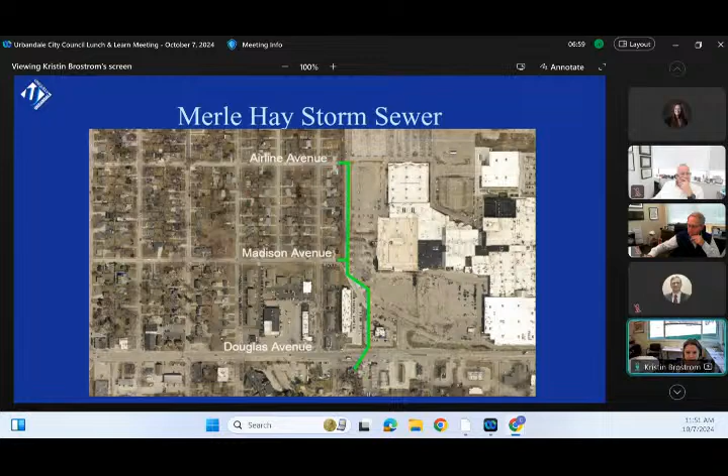Diving right in, hopefully you all can see the presentation. Starting with the Merle Hay Storm Sewer Project, we've got the location map up there. We are putting a very large culvert up through Douglas, through the Merle Hay facility to Madison and Airline. Fred Soddy in our office is the inspector on this one, and Eric Peterson is our project manager. We have about 1,600 linear feet of box culvert and 1,000 tons of riprap at that south end.

The storm sewer is being extended to Madison Avenue and Airline Avenue for further extensions documented in our 2019 stormwater drainage study. This was not one of the original 10 projects prioritized in that study because we did not think it would be feasible given the location, but circumstances changed and we were able to move this one closer to the top of the list. Without this project, we really can't open the rest of that neighborhood up for the continued extensions, so this is really critical to getting storm sewer to that neighborhood.

The cost of the project is $5.78 million. Our contractor for this is CJ Moyna with Progressive Structures. The original schedule was that this was supposed to be a 2-year project. Now that they've gotten across Douglas and they're making their way up through the mall, they're moving very quickly, and they are actually aiming to wrap this up before Thanksgiving.

So the nice thing about it is that other than the mall utilities, which have been a bit of an obstacle, there's not a lot of other utilities in that parking lot to deal with, and so it allows them to go faster than a similar project would go on a street.

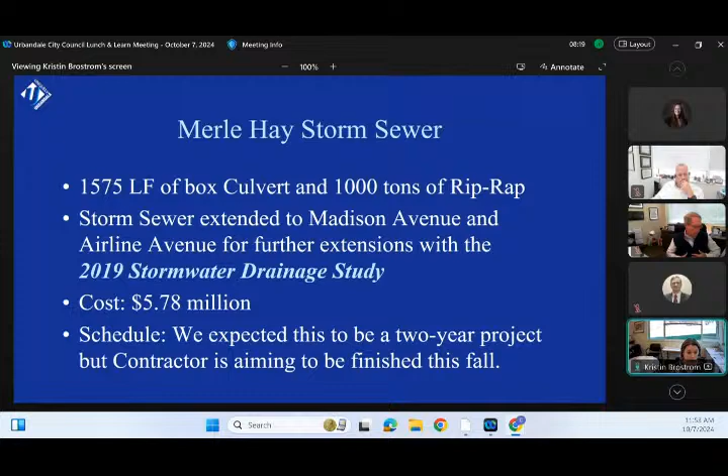A few photos for you here. This is the outfall, where the restaurant used to be, and now we've got this new head wall. The culvert on the left was the existing culvert that ran underneath the restaurant, and you can see the new head wall incorporates the new culvert on the right.

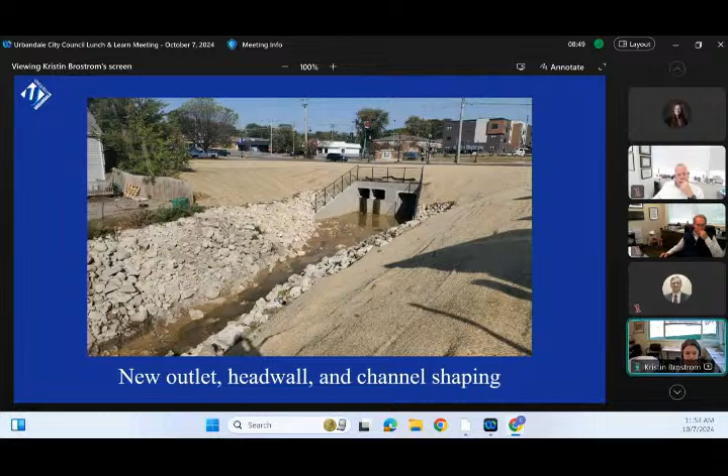We also placed some riprap, and they've put the erosion control matting down. This was a couple weeks ago, so things haven't quite popped for the grass yet, but it will be restored that way. You can get a scale of the size of this box.

You can see the construction workers in there. They brought in a very large crane and backhoe to get these moved around and get those boxes positioned. The trench boxes are fairly deep because they have to make it all the way up around the mall property.

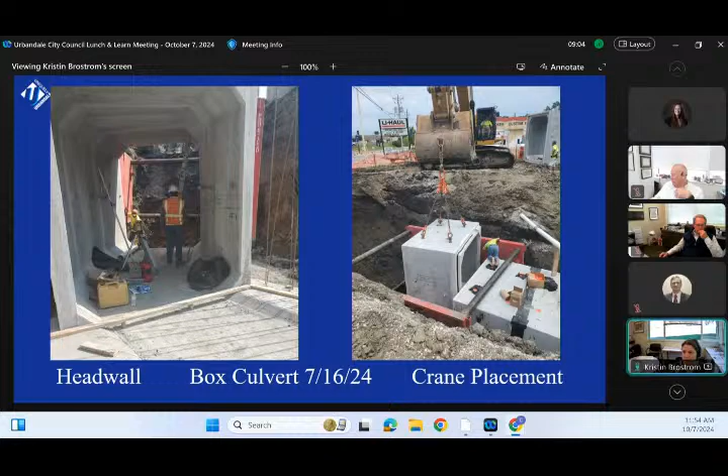Again, another shot of some of the utilities they had to deal with. They worked on supporting the water main and several utility ducts as they slid the box underneath those. That was part of the reason why going across Douglas was slow going - the utilities in that area.

On the right is the shot. It's kind of hard to tell, but we are between Lillis Loft and IHOP heading north through that area. Again, the trench is somewhat deep, which makes it a tricky work location.

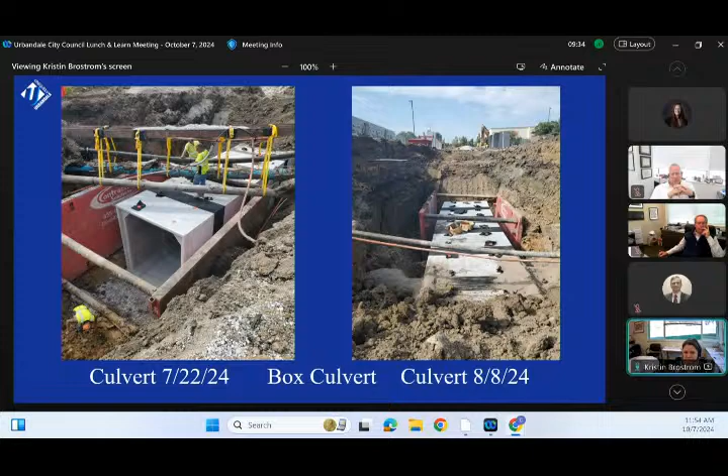This is the pouring back of Douglas Avenue. It was PCC with an HMA overlay, and paving of the IHOP parking lot. The parking lot has been paved and is reopened. They've got a little bit of work to do at the IHOP entrance, and then they'll be done in that area.

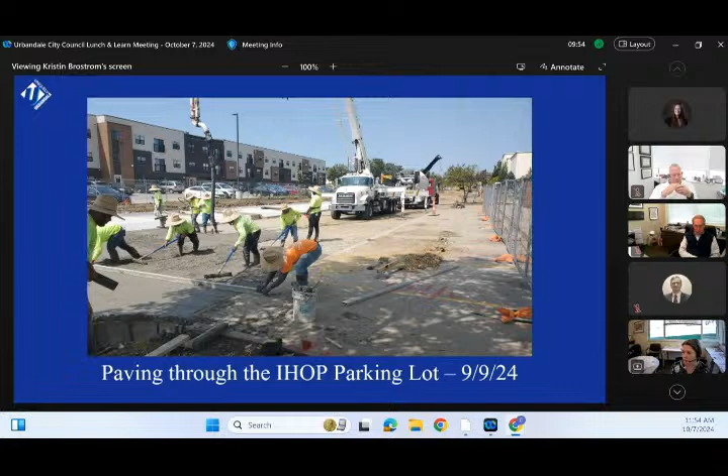So to give you an idea of where we're at now, we are into stage 4. They're hoping to make some of the connections to Madison with a separate crew this week. They are proceeding north into stage 5, and then they'll turn the corner there. We also have an upcoming project, which we'll mention again later, to extend those farther west.

As long as we're here, the intersection at 65th and Airline had some severe flooding in that June 2018 event. It's kind of a local low spot with no outlets. So in a few years, when we can extend that storm sewer farther west, that will really provide much better storm sewer service to that area.

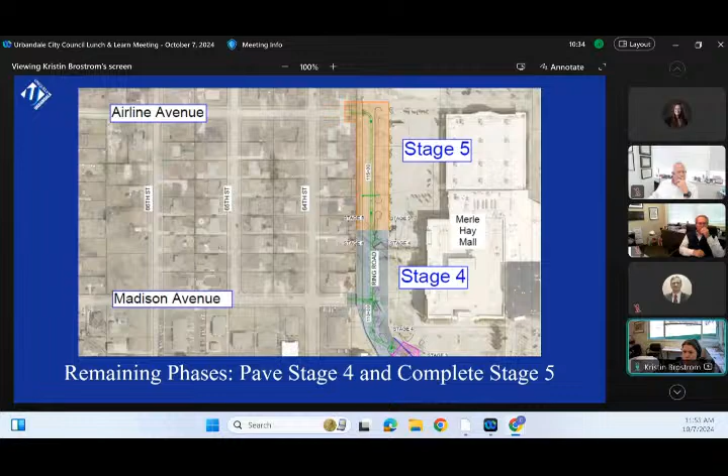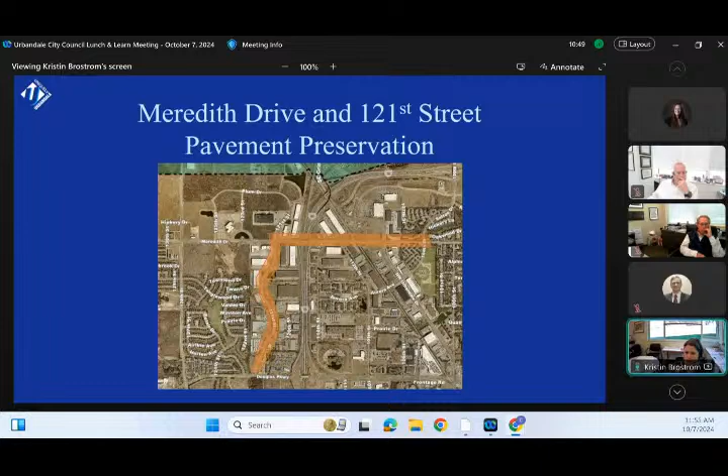We have 12,000 square yards of PCC patching over 2.2 miles. That includes 5,500 tons of HMA overlay. We did that between 114th Street and 104th Street on Meredith Drive. It's a 3-inch thick overlay done in 2 lifts.

As part of our Complete Streets Master Plan, we are building the 10-foot trail and associated ramps from Northwest Urbandale Drive to 104th Street. We already have a trail east of Northwest Urbandale Drive, and next year we're going to do a patch and overlay continuing east to 86th Street, and as council knows, we will be extending the trail with that project. The cost of the project was $2.4 million for the construction.

And another $1.1 million for undergrounding the electrical and replacing the street lights between the railroad and 104th Street. As far as schedule goes, we have the roadway portion essentially complete. They've still got a few structure adjustments to make, but the patch and overlay is done. The trail has to wait until the electrical poles are removed.

Intren is the sub for Mid-Am. They are working on that project now, and we're still hoping that can get in yet this year. Inspector on this project is Scott Ford, and our project manager in the office is Jordan Babler.

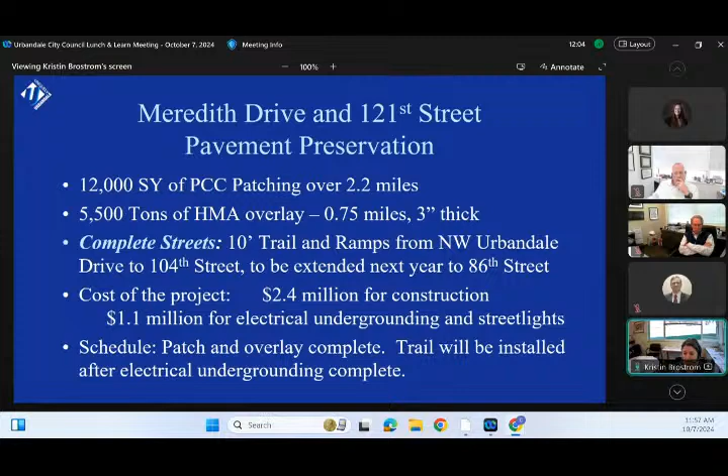Here's a photo of the asphalt overlay work. They did do that at night. It does require full road closure. You can reopen side roads and driveways pretty quickly after that - usually about half an hour is a total closure for something like a driveway if there's no other route. But closing down the whole road and doing it at night really helps the contractor have the room to work and go quickly.

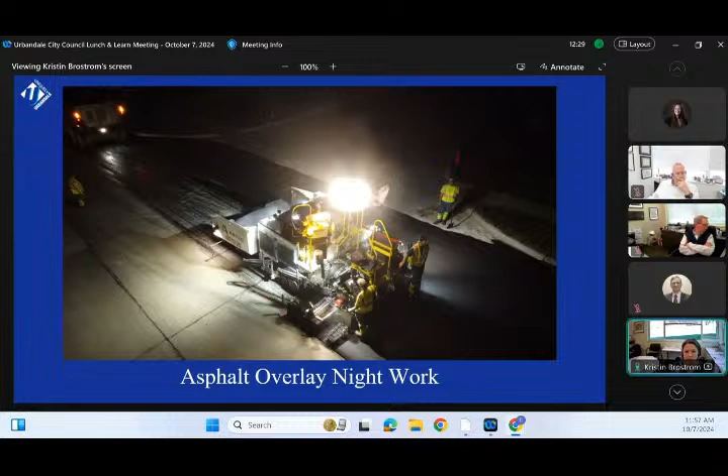And then here's a shot of the completed overlay looking west from Northwest Urbandale Drive. It looks pretty nice when it's done.

As we think about complete streets on Aurora, this is one of the reasons why we want to do that little overlay on Aurora. It really helps the pavement markings pop and you can see things very clearly.

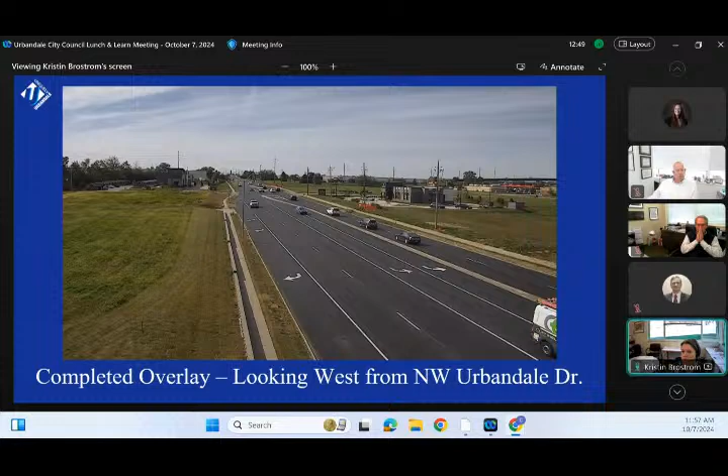70th Street and Hopkins Road storm sewer. I put a little arrow at the intersection of 69th and Hopkins. What happened was the storm sewer was damaged from concrete that was dumped into it. It was almost completely blocked at a couple of locations along this run, and that caused local flooding at that intersection. Thankfully, the overtopping was down the street before it got into people's homes, so there wasn't a danger to the buildings, but obviously it was a problem that needed to be fixed.

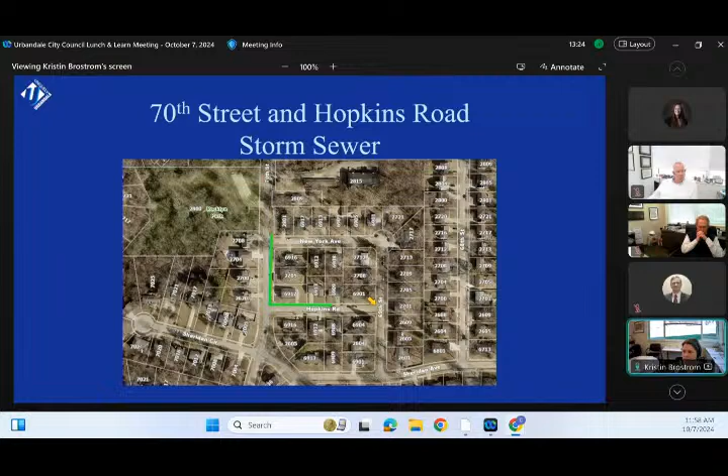Tim Terrell is the inspector for this project. We are replacing 553 linear feet of storm sewer with this. We are upsizing it per those recommendations from the 2019 stormwater drainage study. That's kind of a high-level study, so we did refine those calculations and look at the capacity again, and we are sizing that appropriately. It was a bit of a challenge with the electrical, gas, and other utilities in the area, but we were able to make it work.

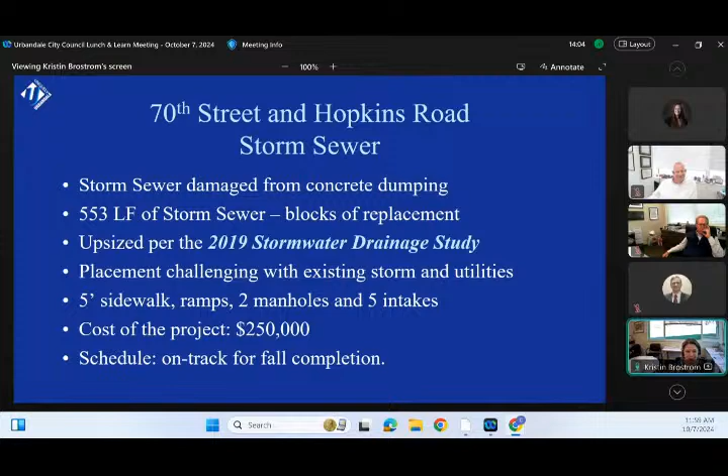We are also replacing the sidewalks with 5-foot sidewalks and the associated ramps. The cost of the project is $250,000, and they're making good progress on it. We expect them to wrap up. I hate to jinx it and say out loud, but in the near future, let's say, they'll be wrapping this one up.

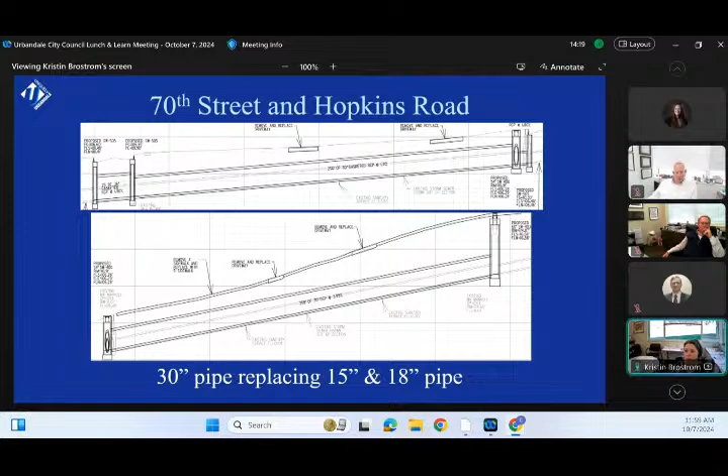Just to get a sense of the size of the change in the storm sewer, there was an 18-inch pipe on 70th Street and a 15-inch on Hopkins Road. Those are both being upsized to 30-inch pipes, so quite a big change. It's kind of tough to get photos on this one, partly because the contractor's moving quickly. So they've got the new backfill in and are getting the sidewalks in and getting those driveways open back up again.

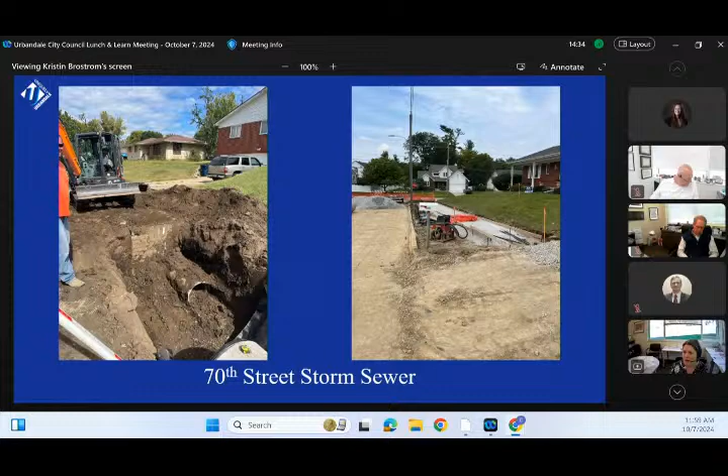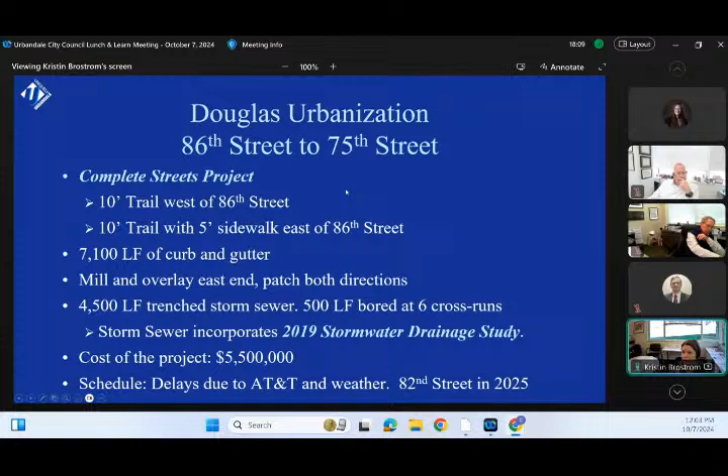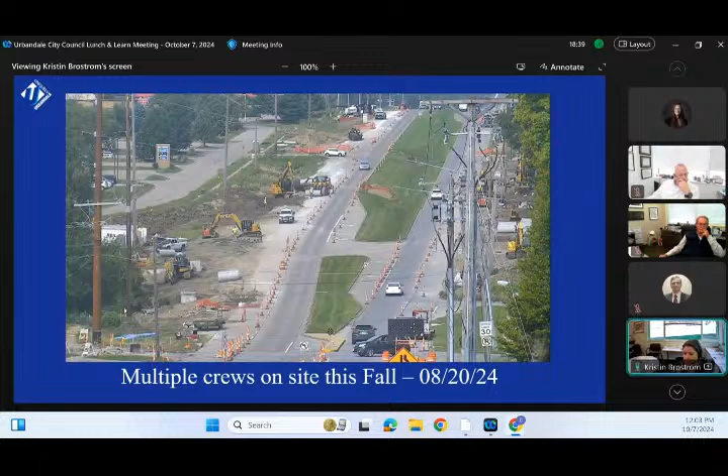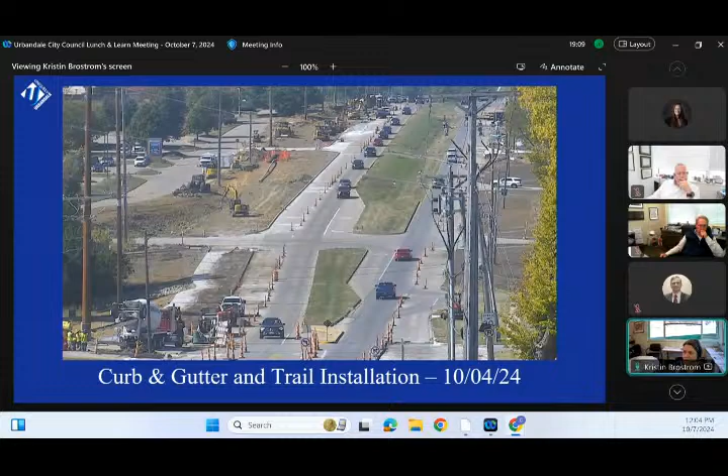And then just a couple of shots of the storm sewer. It is quite deep in locations, again, because we're trying to get that capacity up to the neighborhoods for future extensions.

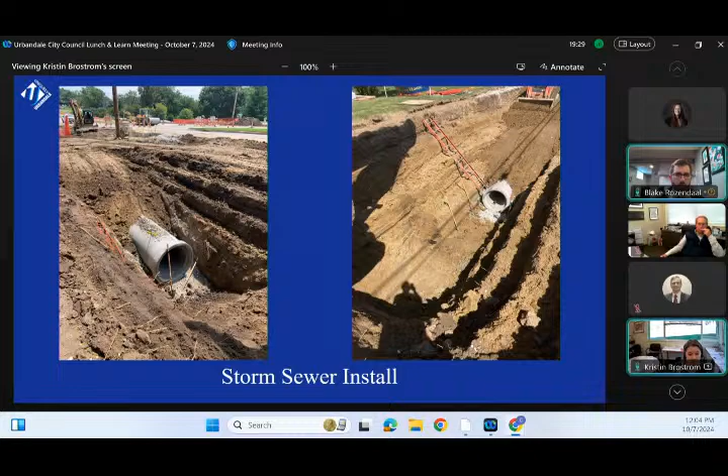Our annual patch program. On the southeast corner of Douglas and 86th, there's a traffic crossing button that's kind of farther back behind all the tape and rope and everything.

Do we know when that's going to be more accessible again, just so that folks getting up to that corner can more easily cross? Yeah, the southeast corner is actually closed right now for pedestrians because of the sidewalk being out, so I do not know when that will go back in. Obviously, the goal is to complete all the work on Douglas yet this fall, so I would hope as soon as they can safely put it in, they'll get it in. Sounds good, thank you.

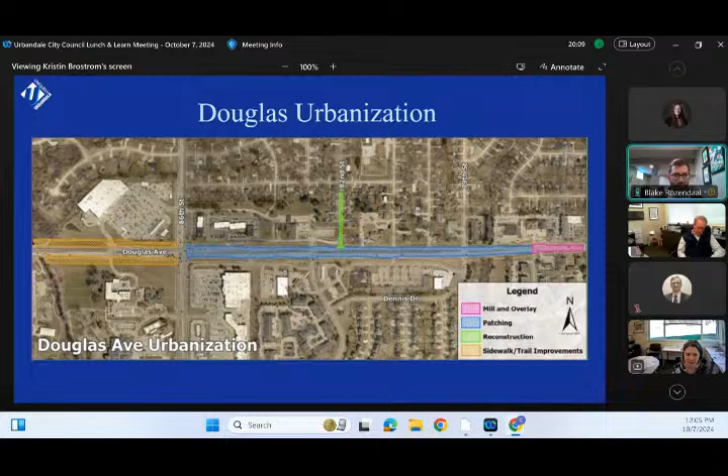Our patch program. We had 3 phases again this year, 2 in residential neighborhoods, and then 1 on Douglas.

In eastern Urbandale, last year we had worked near Lockner Drive. Now we're doing the other half of that neighborhood. It was about 4,800 square yards of patching there. And then in the Parkview neighborhood, we had about 7,500 square yards of patching. We did not patch Parkview itself. Originally that was part of the plan, and then it became clear that the street there was so deteriorated that we really need to look at a full reconstruction. So that's one of the things we'll discuss with the upcoming CIP projects. And then, of course, we always include any impacted ADA ramps with those replacements.

Phase 2 of the project was patching on Douglas Avenue near the roundabout, doing some maintenance on that arterial. The cost of all 3 projects was $1.17 million. A portion of this year's money for pavement rehab was used for Douglas Avenue urbanization, which is why the number's a little lower than our usual levels.

All 3 projects are complete. Brothers Construction was the contractor for all 3, and we are working with them on wrapping up the punch list and final restoration to get those closed. Our inspectors for these projects were Tim Terrell and Scott Ford.

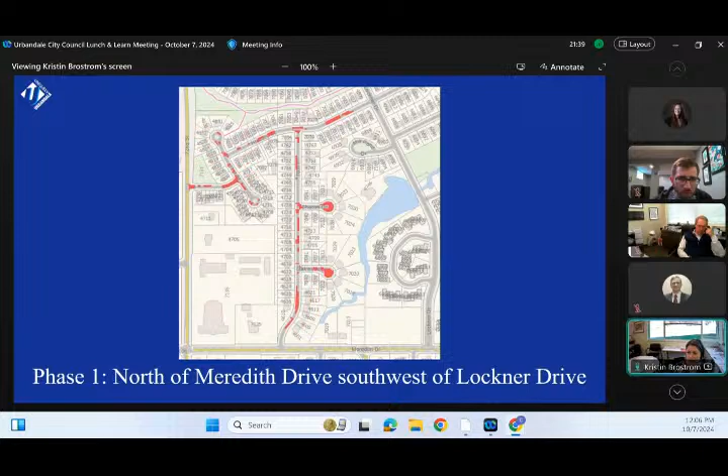Again, just looking at the locations for this, this is phase 1. It was north of Meredith and east of 72nd Street. Phase 2 was along Douglas Avenue, just a few patches that needed some attention. And then phase 3 is in that Parkview neighborhood. Again, you can see there that we did not actually patch on Parkview. Hammond Tree, we also did not patch on because it's a composite pavement. So we'll look at addressing both of those in future projects.

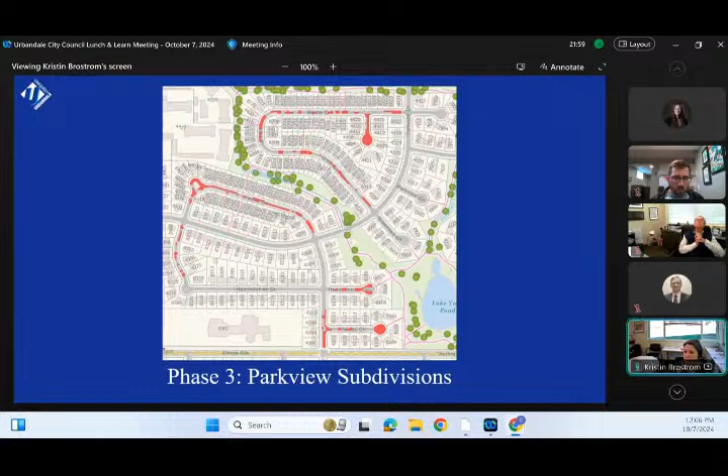Our community entrance signs. We are wrapping up three from the 2023 project at 86th Street and the south ramp of the interstate, at Northwest Urbandale Drive where we replaced the previous sign at that location, and we've got the smaller monument at 100th Street south of 54th Avenue.

That was a $320,000 contract with Edge Construction, and again, we should be closing that in the very near future.

For the project that's currently under construction, we have two gateway signs, one at 104th Street in Hickman and one at 128th Street, the North Corporate Limits. That's also with Edge Construction at $235,000.

Michael Johnson in our office is the inspector for both these projects. These projects do include the lighting. The landscaping will be completed by Parks after the projects are done.

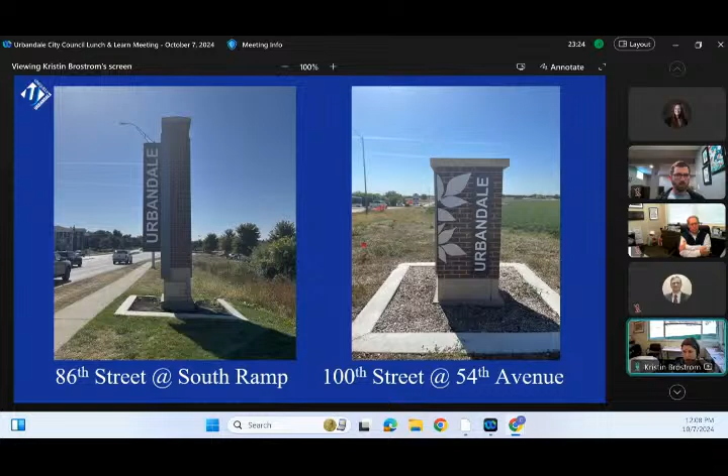Our bank stabilization projects. We currently have a project under contract for the repairs in Sunflower Park and Walnut Creek Regional Park north of Douglas. These were designed by JEO, permits received, and we're under contract with RW Excavating.

I'll show you a little bit more about that in the next couple of slides. As with our past projects, we have made an effort to protect the existing trees and the trail.

We do have some trail repairs that will be taking place with Sunflower Park, but a lot of these we've got vertical banks and fairly deep creeks, and we try to avoid simply laying back the slopes and riprapping the world out there. We try to have more sensitive and context-appropriate practices.

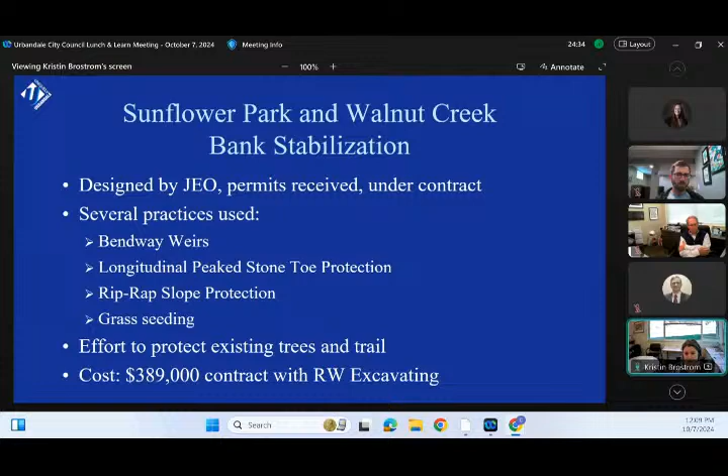This is a $389,000 contract. It has not yet started. The contract will start in December. This is because it's easier to do tree clearing and earthwork in the winter.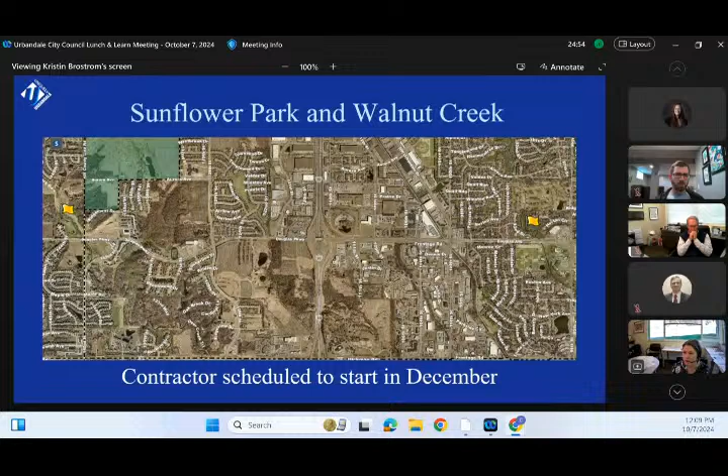So the longitudinal peaked stone toe protection — we used this practice at Beaver Creek a few years ago, and the idea is that you put a line of riprap along the bank in such a way that as the creek naturally evolves and changes shape through the water flows and natural erosion.

That baseline of riprap helps stabilize the bottom of the bank, and it sort of self-fills over time to provide a natural slope.

So by anchoring the bottom, we prevent that erosion from continuing out farther into the bank, but it also helps minimize the amount of riprap that you use and it leaves it in a more natural condition.

It takes a few years to fill in. The intent is that over time it helps to provide that stable cross-section for the flows.

And then bendway weirs — we've used these in a number of locations, and they've worked pretty well for us. The idea is that you put the riprap at an angle, calculated to be at a specific angle, and that does two things: it helps direct the flow of energy back to the middle of the stream, pushing that energy flow away from the bank.

It also allows some siltation behind those bendway weirs, so it fills in and you get a little bench down there, which helps stabilize the bottom of that bank and provide some resiliency when storm events come.

Particularly because we actually have fairly low flows in North Walnut Creek and in Walnut Creek a good portion of the time. They tend to be kind of peaky during storm events, and then they subside.

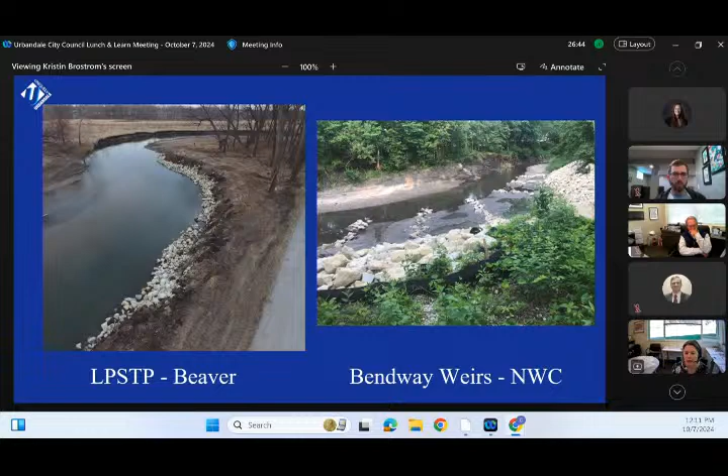So we've got some bendway weir practices, and longitudinal peaked stone toe protection practices. We do have some tree removals that have to take place, and hopefully that just stabilizes the bank to keep it from moving further into the park or into people's property.

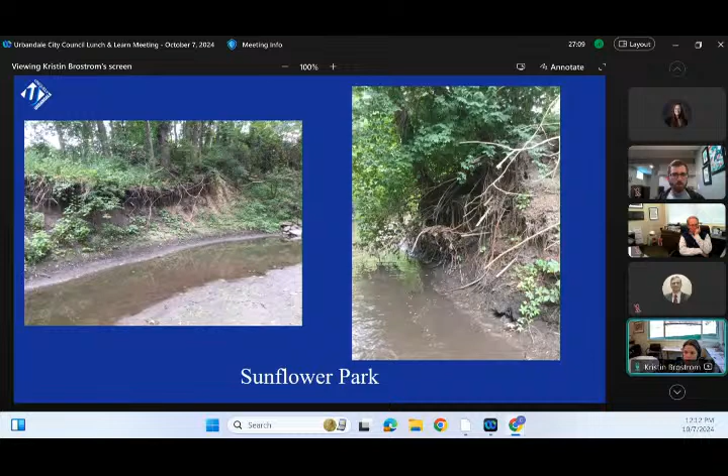And then a similar project for next year with Golfview Park and Walnut Creek bank stabilization, south of Douglas Avenue. JEO is also designing this one for us. We've submitted permits and they're working on refining the design.

Again, we're using those same practices, plus some tree topping practices in Golfview Park, which I'll show you more about in a minute. We've been working with the Parks Department to provide a product that works for them long term, and we made an effort to protect the existing trees and trail while stabilizing those vertical banks.

We do get a lot of concerns from residents when we remove trees, particularly in Golfview Park. It's right in everyone's backyard, so we try to be very respectful of not clear cutting the trees.

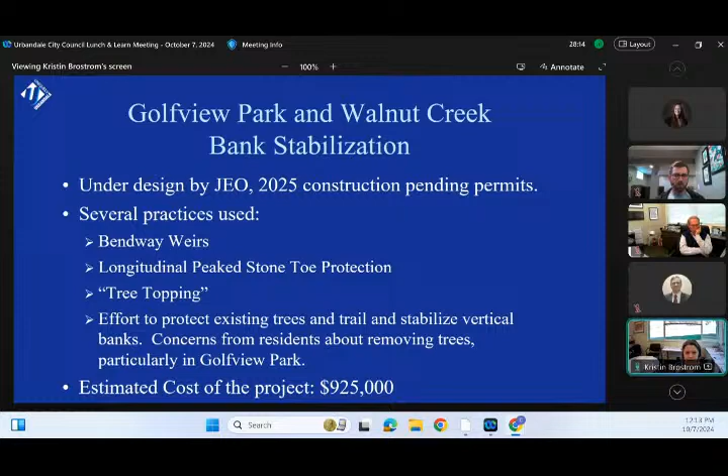The estimated cost of this project is $925,000. We did get pretty good prices on the last bank stabilization we just talked about, so I'm hoping the cost goes down when we actually go out to bid, but it's kind of hard to estimate what these projects will cost. A lot of it's labor instead of materials, so it's a little tough to estimate.

Again, the locations for you there on Walnut Creek, south of Douglas Parkway, and then in Golfview Park, east of 100th Street.

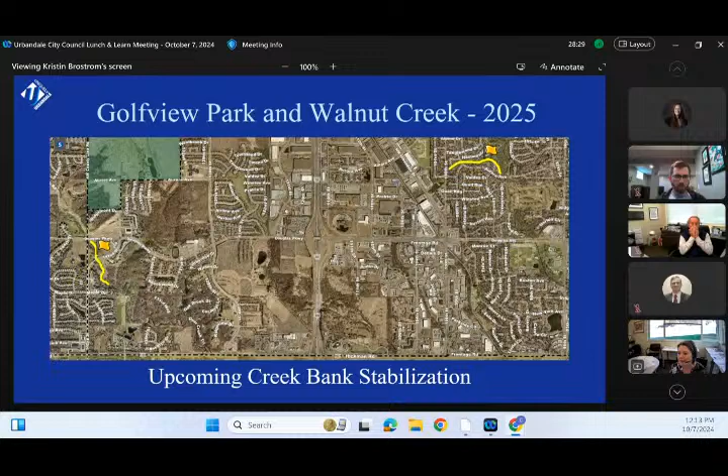So one of the practices we're looking at with this project is called tree topping, where you actually cut off the tree either a few feet above the ground or farther up. We've had a lot of discussions with parks about what this will look like visually. The idea is that the leftover stump provides habitat for a number of animals, plus it allows a more natural degradation over time without disturbing the bank.

So that's one of the practices we're looking at in Golfview Park in particular.

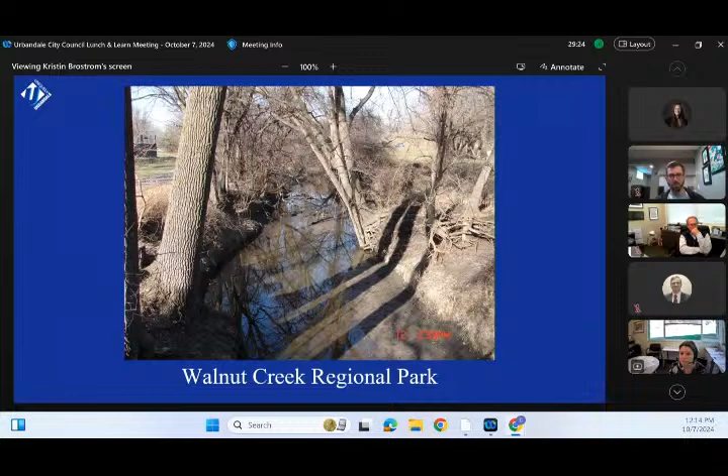One thing I didn't mention was the Walnut Creek Regional Park Trail and Bridge. That's also with RW Excavating and will be done this winter. They'll start construction on that as well.

We've got other inspectors in the office. Coleman May and Sean Watson helped with the sidewalks and trail projects. Dustin Creech, one of our project managers, also assisted with those. And then we've got a new GIS technician, Caleb Strupy Wheeler, who's been helping with our sidewalk program, really helping us get back up to speed with our GIS stuff. And then our locator, Cheyenne Thomas, helps with all these projects, making sure everything gets located.

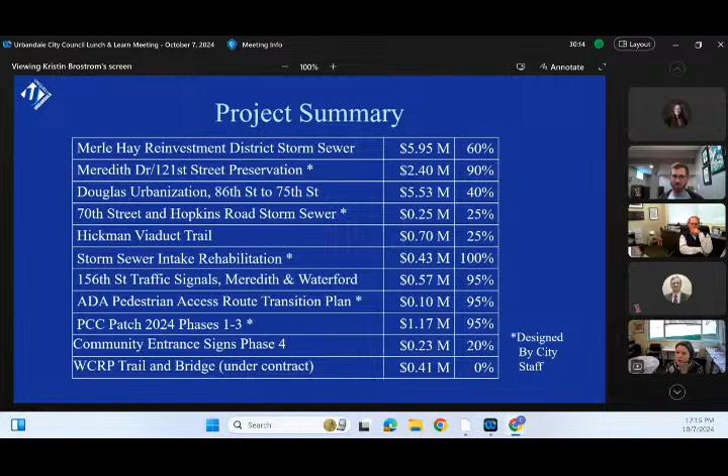Other projects not on that list are kind of smaller ones we've also been working through. As I mentioned, we've had a number of trail and sidewalk projects this year. We've got our ongoing sewer maintenance projects, and then the 100th Street Adaptive project, where we've been working with the DOT to finalize the requirements, and we're hoping to do the final phase of that shortly.

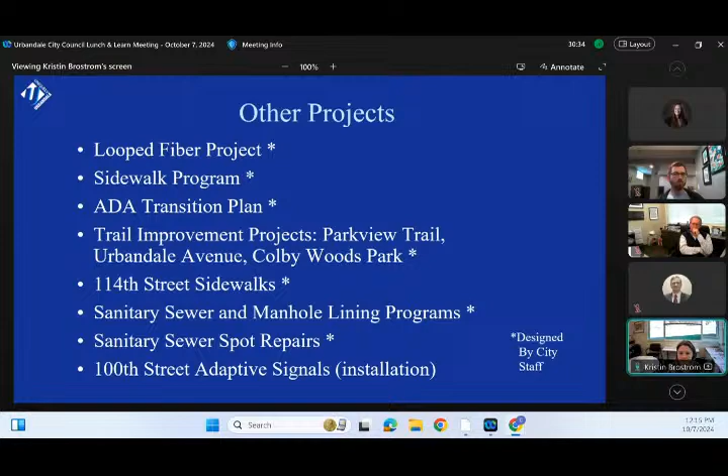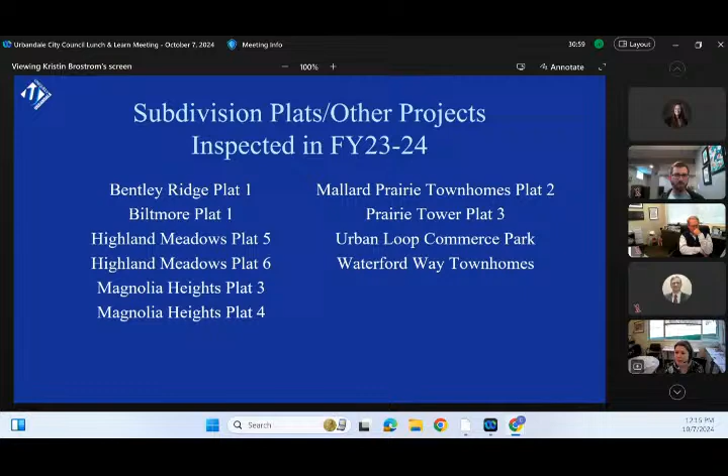In addition to our city projects, we inspect subdivision projects that are building public assets, public infrastructure for our acceptance. We had quite a few projects last year, and a lot of these are fairly large. Highland Meadows, Plats 5 and 6, Bentley Ridge Plat 1 - these are large projects. Prairie Tower and Urban Loop Commerce Park are two of our commercial developments. And then we've got a number of others still in progress. Bentley Ridge is a large plat.

Total Health Experience is the commercial development on North Park. We've got a number that are in the queue. It has seemed the last few years we had a big spike in development post-COVID, a lot of lots being built. We have quite a few lots in Urbandale.

Development is slowing down a little bit. The subdivisions are getting smaller. I think across the board, across Iowa, we've heard that development is slowing. Also, I think at this point, we do have a lot of lots in Urbandale that are available for building, so there's less of a demand, but it is slowing down compared to the last couple of years.

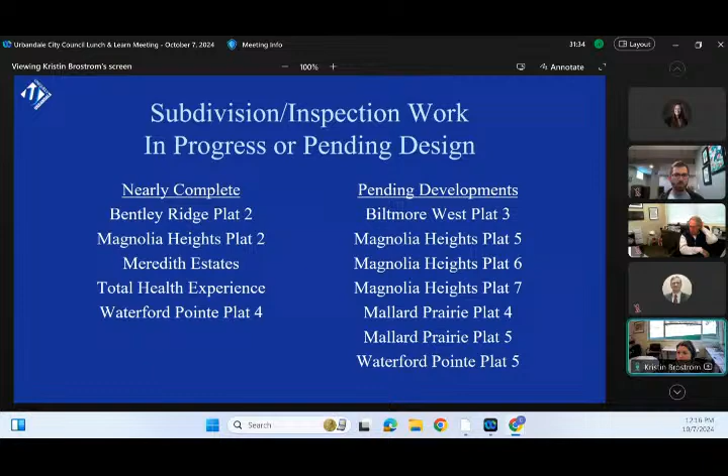Looking ahead to 2025, the major projects coming up: we are reconstructing 142nd Street as our standard 4-lane arterial cross-section, including the Complete Streets Trail from Meredith Drive to Waterford. That's a joint project with Grimes.

The Roseland Drive reconstruction, we'll talk a little bit more about that in a moment, but that's our next major project from the 2019 Stormwater Drainage Study. Our usual annual patch project. We've also got a number of projects for patching and pavement preservation that are using TIF funds, such as the Justin Drive project. We already talked about the bank stabilization. And then we've got our usual, I guess you might call them smaller or routine projects, the ADA plan, trail improvements, traffic signal improvements, that sort of thing.

Obviously, the Hickman interchange is continuing with the DOT's lead on that. And then the WRA trunk sewer, we'll talk a little bit more about that, is coming in the next year or so to improve their capacity.

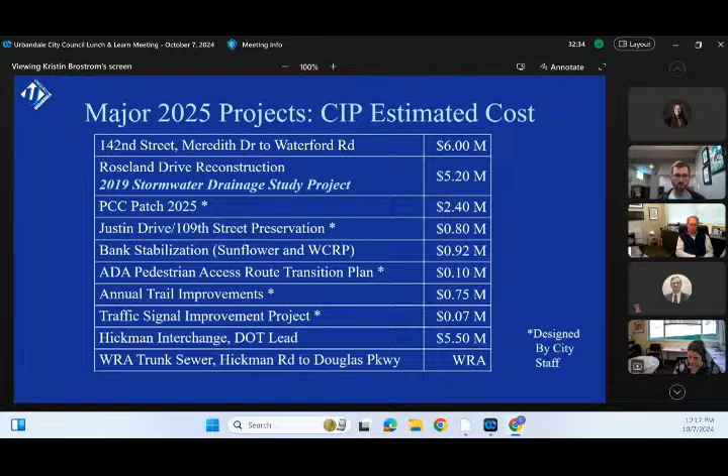They are constructing a new trunk sewer from Hickman to tie in to Douglas, tying in near where Waukee and Grimes started their sewer extensions several years ago. For the most part, it is paralleling our sanitary sewer. There's a little bit of change in alignment up by 142nd Street, but for the most part, it parallels us. So we've been working with the WRA and Snyder and our Parks Department as this comes along.

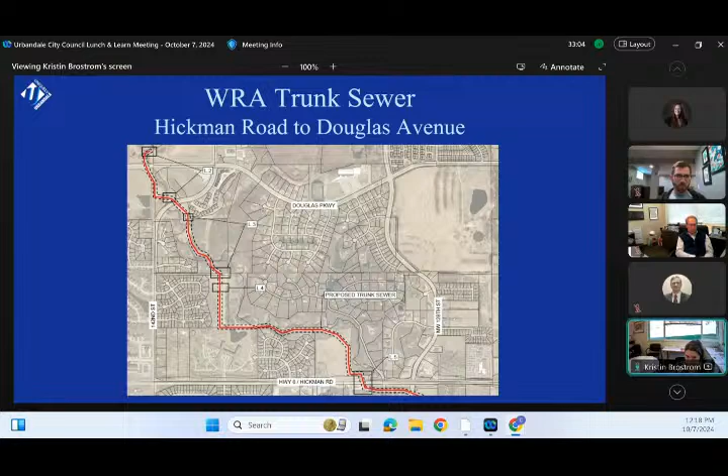To give you the bigger picture of that, the red is our section. They are hoping to start that next year. Depends on right-of-way acquisition and their permitting process, but that's their goal. It's kind of unusual to start at the top end, but that's just the way this project worked out. They'll continue on to the southeast in 2 more phases to get down to the trunks in Des Moines. So we'll keep you updated on that as it comes along.

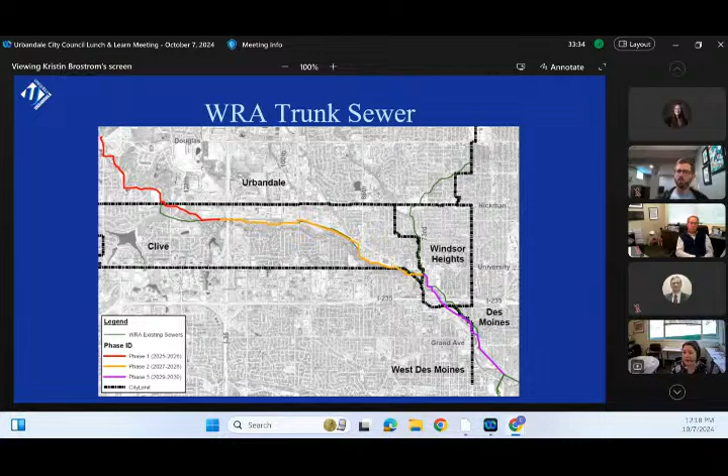Circling back to our 2019 stormwater drainage study, we've been giving you annual updates on how we're proceeding through that. Just a reminder that we had the 2021 study - we call it that because it was completed in 2021, but it was started in 2019, so we call it the 2019 stormwater study. There were 10 locations initially identified for first priority. As I mentioned, we've moved stuff around as projects come along. It opened up for that Merle Hay project, so we certainly wanted to bump that up higher on the list. We'll continue to reevaluate as circumstances and projects come down the pipeline.

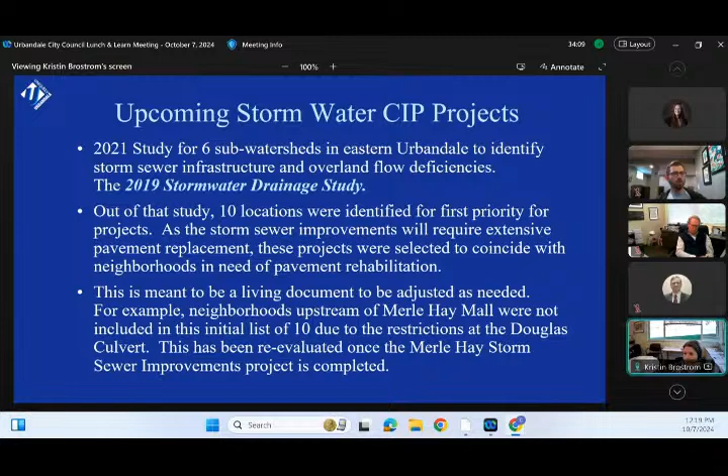Our next major project is the Roseland Drive project from the creek up to 72nd Street, and then on Palm Drive from Roseland to 72nd Street. We are aiming to go out to bid for this in January.

We've been going back and forth on the staging for this. If everything goes smooth, and you know how that goes, I think it could be a 2-year project. Our suspicion is it'll probably end up being a 3-year project. Obviously, with these older neighborhoods and the narrow right-of-way, we have a lot of utilities to deal with. We are in ongoing discussions with Mid-American Electric and Gas on how to service them while the construction happens.

This also is a project that feeds into our next agenda item, the Footing Drain Disconnect program, so we'll be circling back on this as part of that agenda item. We are planning to have a public meeting on this. I don't know if we can get it scheduled yet in October, probably in November before Thanksgiving for the neighborhood.

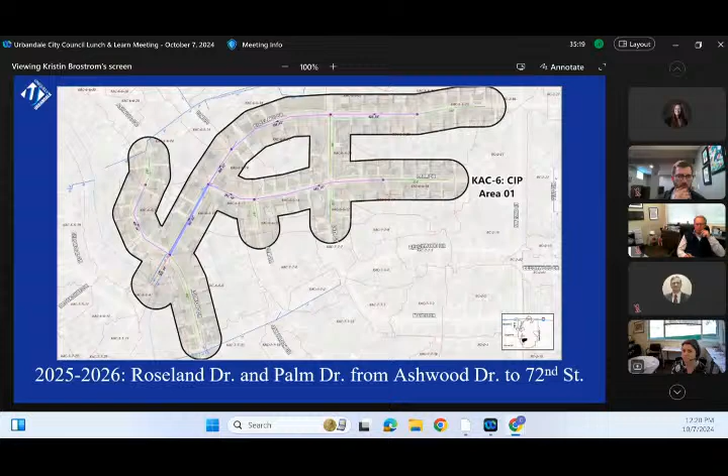Again, our upcoming stormwater CIP projects right now: Roseland Drive would be 25 to 27. 66th Street, that's the one I mentioned.

Oh, you know what? I got these flipped around. 66th Street, 65th Street in Townsend - that'll be at least a 2-year project, 2026 and 27.

That's Meredith Drive and then south on 65th and 66th to provide storm sewers to those neighborhoods. The Airline Avenue, Madison Avenue extensions should just be a 1-year project, 2026, and that's the one I talked about previously.

Extending from that new Merle Hay storm sewer west to provide relief for those low-lying intersections. And then a little farther down the road, Oliver Smith is our next in line. We've got some flexibilities - we decided this, but these are major projects to design, so we need to look a few years out to see what fits best in the schedule.

Kristin, what type of communications happening in the 66th Meredith, 65th neighborhood for planning purposes?

So we are very early in the design process for that. We selected the engineer a few months ago, and we haven't even gotten a preliminary submittal yet. We talked conceptually about where some things could go. We will have some of the same difficulties with that project that we have with Roseland Drive, how to get the construction through with the electrical and the gas. I would expect we would follow a similar sequence of notifications on that we do for Roseland.

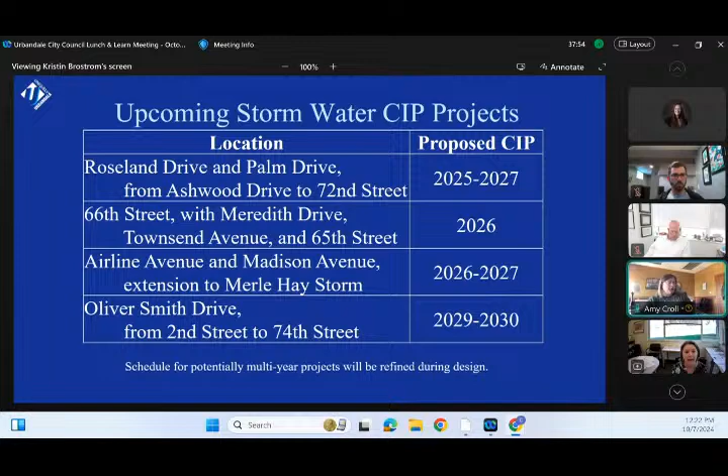Oops. Any other questions? What's a stormwater stream restoration project where you're using grasses? Can you tell me what are we getting, natives in there? What are we doing? Sure.

So we work with the park department on that, and there are many locations where we do put natives in. There's some others where they tend to go with more like the type 2, the more rugged no-mow. It's not necessarily a full native mix, but where it's intended to grow a little taller to provide some stability. A lot of that is we're really restoring the areas next to the trail.

Natives, you got to be careful on your slopes on where you place natives, well, any grasses actually. So a lot of those areas, if to put it back at a flat enough slope in order to make grass the only covering, we'd be laying things way back and taking out trail and trees and everything. So that's why we use a mixture of seeding and riprap. For example, like the Merle Hay outfall, we need riprap there because it's a 1.5 to 1 slope - we can't lay it back flat enough to use grass seeding for that surface.

So the foundation drains are... control, there it goes, okay. The foundation drains are the drains around the bottom of the house that drain the foundation of the building.

Storm sewer and sump services began to be regularly installed in the 80s. Sanitary sewer is typically deep enough that a floor drain in the basement can drain to it. So before storm sewers were installed, oftentimes that footing drain of the house got tied into the sanitary sewer. They can be routed to a sump pump pit, and if a sump pump is installed, the stormwater flow is pumped up to discharge to ground or connect to the sump service. Again, the storm services are usually quite a bit higher than the sanitary services, and I've got a picture in a minute that helps explain that a little bit more.

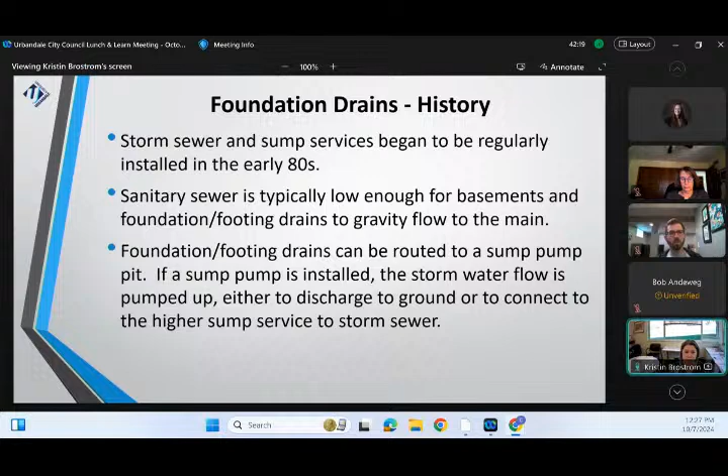So for these older neighborhoods that did not have storm, sometimes still don't have storm - that's part of our 2019 stormwater drainage study improvements, adding storm to these neighborhoods. We know there are foundation drains connected to the sanitary. The foundation drains connected to sanitary are really environmentally irresponsible, detrimental to infrastructure, and costly to the city's residents. Our city code expressly prohibits this connection - every city code I looked at expressly prohibits it. Now, we don't necessarily have a record of which ones are hooked up in the older part of town.

It's not like we're going hunting for these, but it's not allowed for any new builds. New foundation drains, new buildings, new sump pumps that are installed have to connect to storm sewer if available, or they may discharge to grade. Obviously, new developments built since the early 80s have storm sewer and sump services provided. If a house is built in an infill location, or someone adds a sump pump to a house, they have to get a permit for that. We do not allow that discharge to be hooked up to sanitary.

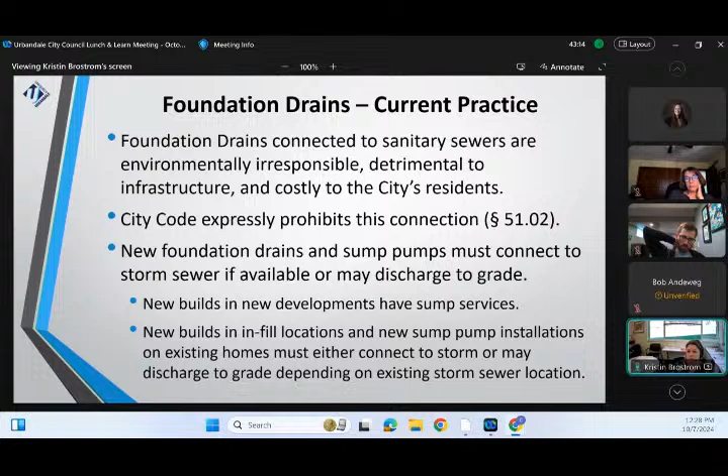Why is this a problem? Sanitary sewer does not have the capacity for stormwater - they're not designed to handle footing drain stormwater coming into that pipe. When you have a rain event, for example the June 30th, 2018 event, this overloads the sanitary sewer. And unlike storm sewer backing up, when sanitary sewer backs up, you get raw sewage coming out of the pipe in people's basements.

That additional flow from foundation drains put into the sanitary sewer makes it down to the treatment plant, treated by the WRA. Ultimately it's paid for by the community as part of the number of gallons treated, and that cost gets passed back through sanitary sewer fees. Eventually, if foundation drains are feeding into the sanitary sewer, we get capacity issues, and additional sewers will be needed to address those limitations.

Environmentally, it's wasteful to treat stormwater - we don't have to treat it. That's why we've got the MS4, the separate storm sewer permit from the DNR, and it doesn't make sense to put it into the sanitary sewer and have it treated with sanitary discharge.

We're doing a lot of work on current and upcoming projects to upsize storm sewer and provide storm sewer to new neighborhoods, installing sump services with those. If people don't hook up to those new storm sewers, we're not getting the full impact of those millions of dollars of infrastructure we're adding to the ground. Now is the opportunity for people to get their homes onto that new sump service and disconnect from the sanitary. As I mentioned, much of the damage to homes in the 2018 event was sewer backups through the floor drains because of that overloaded system.

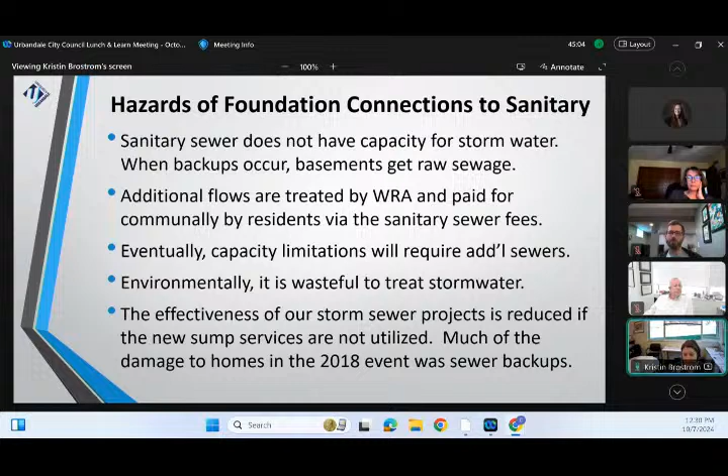So again, just a little picture to explain what happens here. You can see the basement of the house, and you've got the foundation drain around here. Any drains in the bottom of the basement would also come into the sanitary service, and these sanitary services are typically positioned so the house is above it. That's one of our current practices with new subdivisions - setting the elevation so each house is above that sanitary sewer to allow that gravity flow.

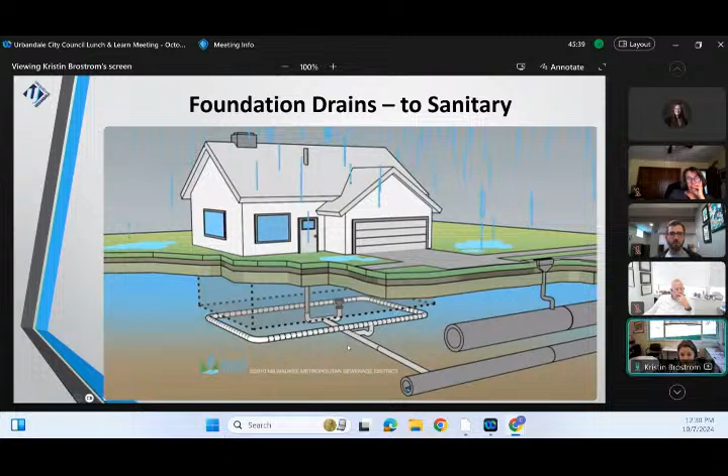Ideally, this foundation drain tied into this sanitary service would not occur. So when it's disconnected from the sanitary service, typically it gets routed to a sump pit, which then kicks it up to ground level and discharges it into the yard.

That's fine from an environmental perspective. Putting the flow back on the ground helps with groundwater infiltration, and it can flow overland. It can get a little messy in neighborhoods, though. We get a lot of complaints about someone's sump pump draining into their side yard or being too close to the next property, too close to the fence.

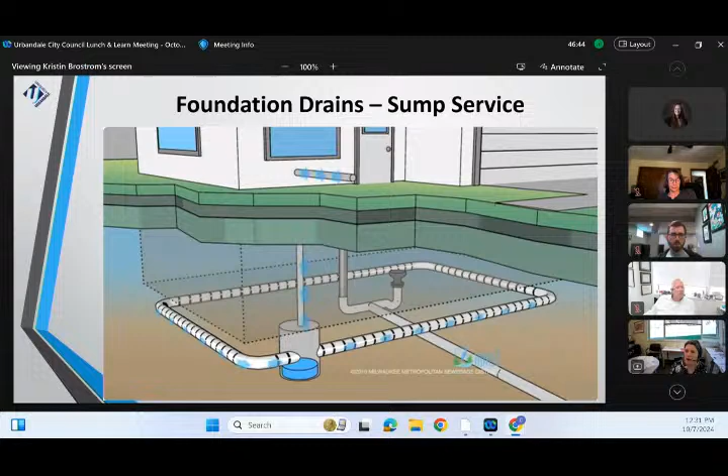So the practice now is to have this pump up a few feet below the ground, and then it goes out to the storm sewer service. You can see in this previous picture where the storm sewer is higher up, so you still need that sump pit to get it to the higher elevation and kick it out. Typically, if a house has a sump pump, it's not connected to the sanitary sewer because it's already kicking that drainage up to a higher level and either kicking it out to ground or kicking it out to the storm sewer.

We have done 3 major projects in the past that have provided storm services in areas where previously there was none. Back in 2011, there was a 66th Street relief sewer project. This was a sanitary sewer repair. Some storm sewer was installed with it, and where that storm sewer was installed, some services were provided. There are about 36 residents that were provided some services then.

The 73rd Street storm drainage improvements were constructed, I want to say, between about 2013 and 2016, ended up being a 3 or 4 year project. There were 50 sump services installed with that project to properties that previously either didn't have a connection or would have had to make their own connection to the storm sewer.

And then the 72nd Street reconstruction project a few years ago went from Douglas up to Prairie, where the new Olmsted Elementary was being constructed. It also went west on Ridgemont and connected to the 73rd Street project from a few years previous. There were 43 new sump services installed then.

When we install a sump service with our city projects, we take that line from the pipe to the right-of-way, so out past the sidewalk into the front yards of folks. This is the same thing that's done in new subdivisions. When a developer builds a new subdivision, they take that sump service out to the right-of-way, and then the builder can hook up from there to the house.

With the 72nd Street project, the USSD did offer an incentive program to encourage people to disconnect from their sanitary and hook up to this. It was a partial cost share - up to $3,500 they would give to property owners to defray the cost of that.

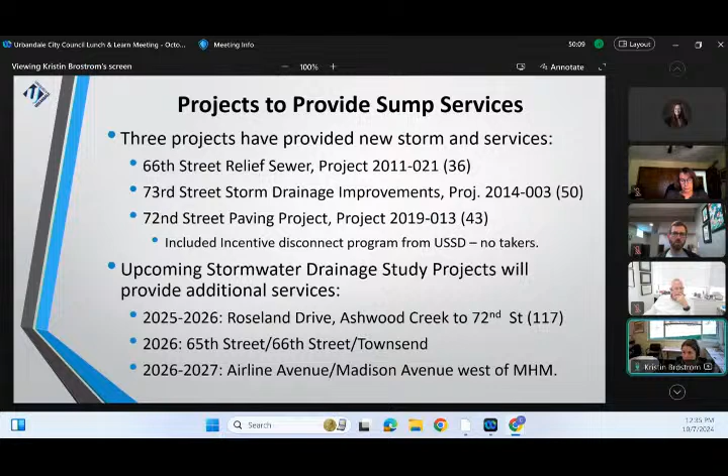Looking at what other cities are doing, Altoona has had a disconnect ordinance since 2011. They don't provide any assistance for that reimbursement. I do not know if they provided that initially and it's just now that they don't provide it.

I can look into that, but currently they do not provide any assistance to hook up. They do charge you $100 a month after 180 days if you've been notified to disconnect and you do not do so. Same thing with Ankeny.

Ankeny's ordinance is a little bit more recent, from 2021. They don't provide any assistance. After 18 months, they charge you $75 a month.

Des Moines has had an ordinance since 2014. They do have a program to offer assistance for this. Their fine is a municipal infraction, and in Urbandale, our municipal infractions are $750 a day plus $1,000 a day after violation. Usually it goes to civil court.

It's hefty to go through that process. Grinnell has an ordinance, but it only works with sump pumps hooked up to storms, so it's a little different than what we're looking at. They also have no assistance and they have a fine.

Norwalk does provide a little bit of assistance, $750, and then they have a fine for failure to hook up. Same with Waterloo. Waterloo was the most generous with the assistance.

The other cities in the metro, as far as I can tell, do not currently have an ordinance requiring this. They do have an ordinance saying you're not supposed to hook up, but not a specific disconnect ordinance.

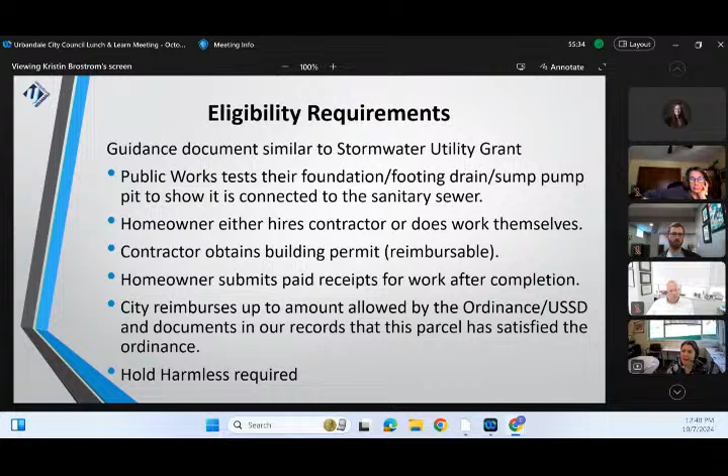And then thinking about how we notify people about this, we've got the 3 locations, the 3 projects that already have some services. Certainly 72nd Street knew those sump services were installed, so it's not a surprise to them that it's there. We would let them know that there's an upcoming project that's going to be added to the program. We would notify them when the project is actually complete and actually added to the program.

Again, Roseland Drive, they're going to see the contractor coming through. They're going to know how the project's progressing. It's not like it's going to be a surprise that overnight they suddenly got a sump service.

And we can certainly coordinate location of those sump services with the residents. If they know which side of the house they want to put their sump pit in, we can slide that sump service and provide a closer access for them.

Certainly, we were open to that discussion on 72nd Street. In fact, I think we did move some services for better future access, and then as far as we know, folks didn't hook up. And then the council would accept the project.

As part of that final acceptance, we would add those parcels that were affected to the program. This would start that timeline for reimbursement and for potential future fees on the bill.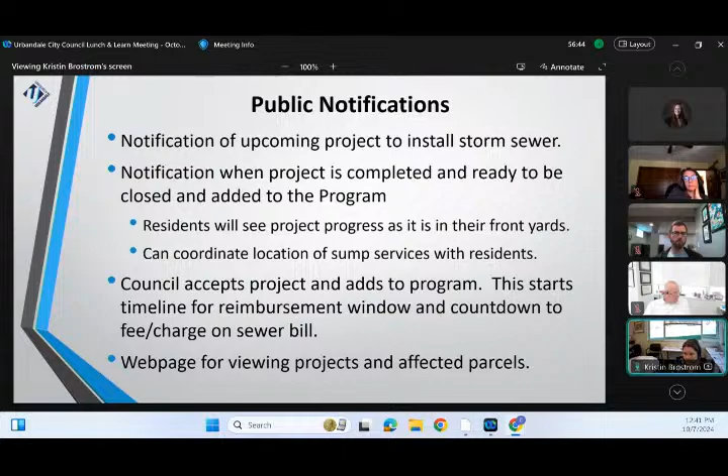For a matter of private records, private information, I don't think we would post on here whether or not a parcel has hooked up. We would just note whether or not the parcel was in the program. We would, of course, keep our own internal database of who's hooked up.

So if someone's looking at buying a house or if someone's not sure, they could reach out to us and we can get them more information on that.

And then similar to our stormwater grant and similar to our monitoring of known septic locations, again, we would track all that documentation. We would know who's been contacted and who has either chosen to hook up, has gone through that process, or who we know hasn't yet, and we can document that internally.

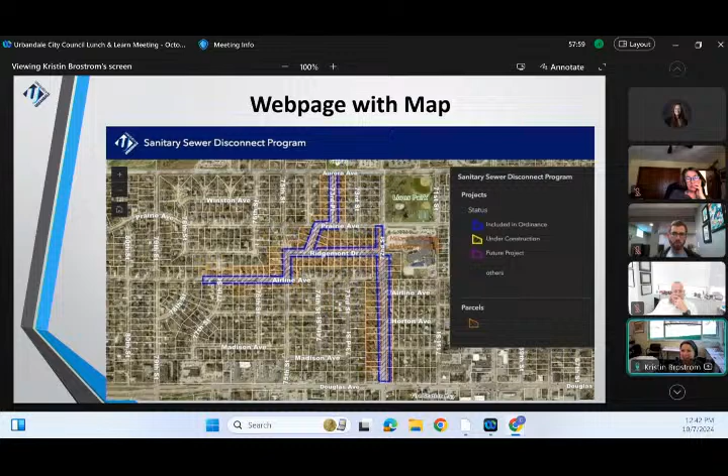So I guess some feedback that we need from you all today. It is our belief that a foundation drain disconnect ordinance will improve our environmental sustainability and improve the effectiveness of the new stormwater systems that we're putting in.

If we move forward on an ordinance in the next few months, that will coincide nicely with the start of our next stormwater project on Roseland Drive. We can certainly start from day one, letting people know that this program and this ordinance is coming and that we're working out those details, and they need to be ready to hook up their houses.

So I guess our two questions are, does the council wish to move forward on this ordinance? And if you do wish to move forward, what are your thoughts on the incentives and disincentives?

One question I have is, with stormwater connection, is that something that is Neighborhood Finance Corporation eligible to? I can look into that. I do not know the answer to that. Good question, we can find out. I know that they make other improvements available, but let's find out if that's something that eligible participants could have.

Also, again, I know we talked about it internally, and I know we're hitting you with a lot of information. Certainly, this is something to begin the process of discussion and thought process. We can put this on another future council agenda, maybe at the end of the council, just to give you time to absorb, to think about it, and then we can answer any more questions, and have general discussion among yourselves when you're all face to face too.

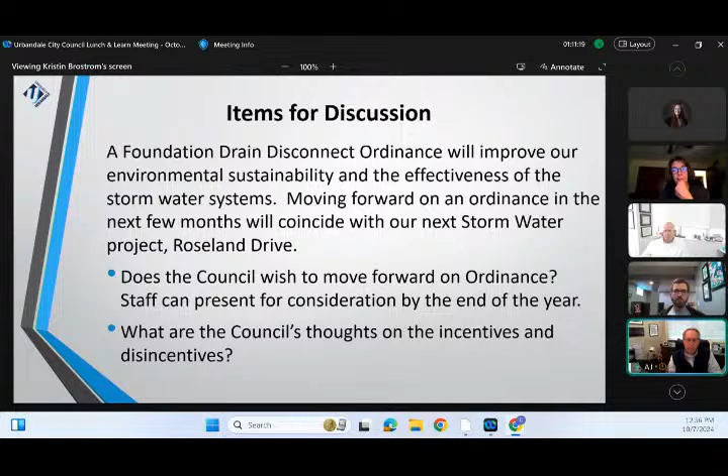We can get some of these answers for you. We'll plan a little discussion at the end of next week's council meeting. Great, that'll keep us on track. And I know I haven't even seen the schedule yet for the agenda, but just something now that we've given you this, and as we're going to send the deck information out, we'll have a chance to talk too.

I'll get back with John Conyer. He did a lot of work on the NFC. We can check with some insurance folks about what it means. It's like flood insurance for your home, so to speak. It's not a national program, but it's something where someone else is going to financially assist you, and provides you some additional assistance. Not having gone through this personally, I don't know if your homeowner's insurance covers floods and those type of backups.

Typically, they don't. We get a lot of questions addressed when they have a storm sewer backup. The city does not pay that, and there's some state law that provides us that coverage. So again, does it fall back on your homeowner's insurance, and how do they address it?

I think that's a great question, because again, you're right, Amy. The numbers for homeowners insurance, just from our discussion around staff time, have been astronomical — 40, 50 percent. So any little bit will help. We will try to get as many answers as we can. We'll schedule something at the end of next council meeting for you guys to at least have your continued discussion.

Just one other quick thought. Since the WRA ultimately benefits from this program, I wonder if they've ever done anything to help support such an initiative, because that's really where some of the savings would be, through the WRA's treatment processes, et cetera.